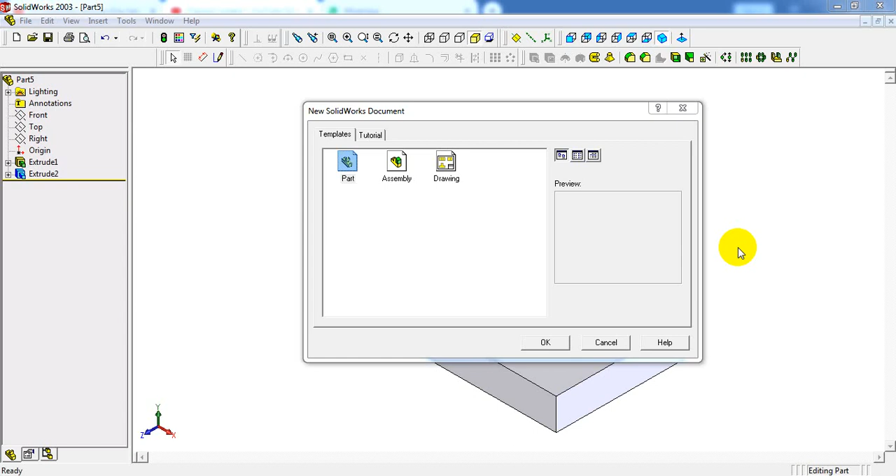Next, total height of the part is 25 plus 25. Total height is 50 mm. First we have to draw one rectangle in the front plane and do the dimension as 120 into height 25, and extrude the width of 15 plus 30 plus 15. Let's see how to do this.

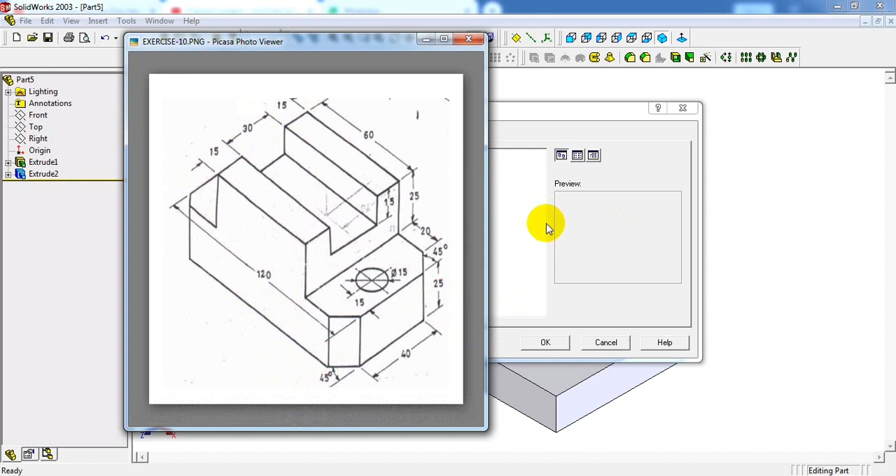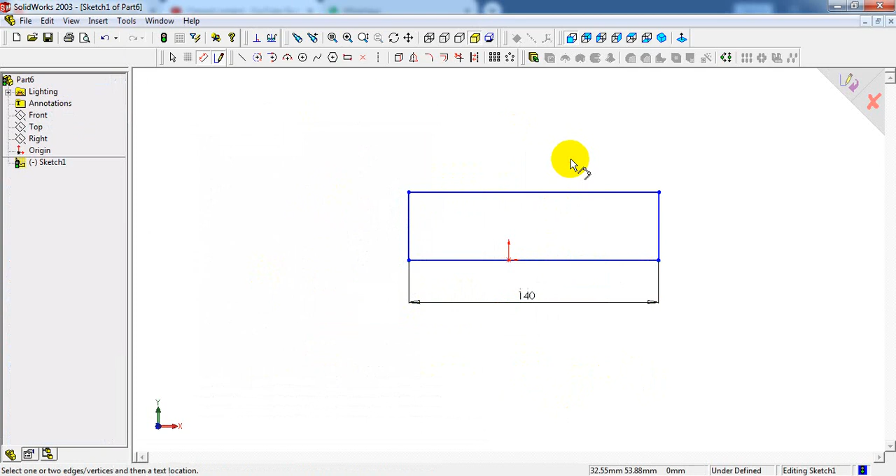Select part file and select OK. Select a sketch, select rectangle, draw one rectangle, make dimension, length is 120 mm, okay. Next, height is 25 mm.

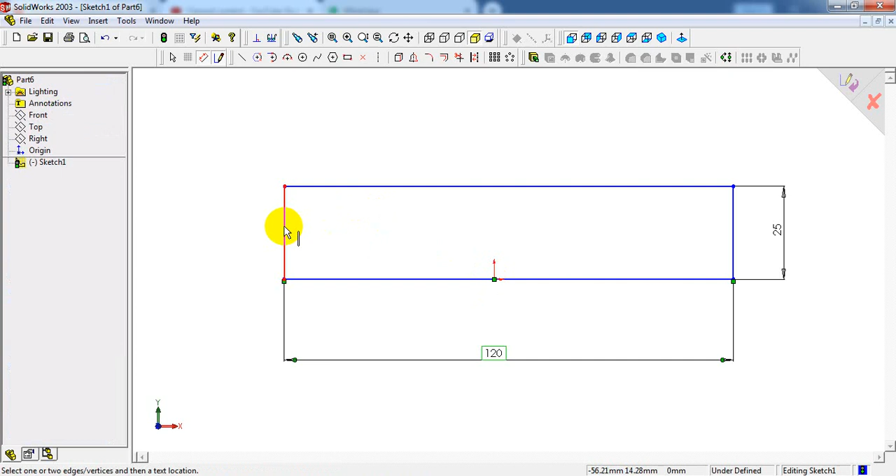We have to bring this origin point exactly the center of this rectangle. So select origin point followed by vertical line of the one side of the rectangle. Total length is 120. So half of 120 divided by 2 is 60 mm.

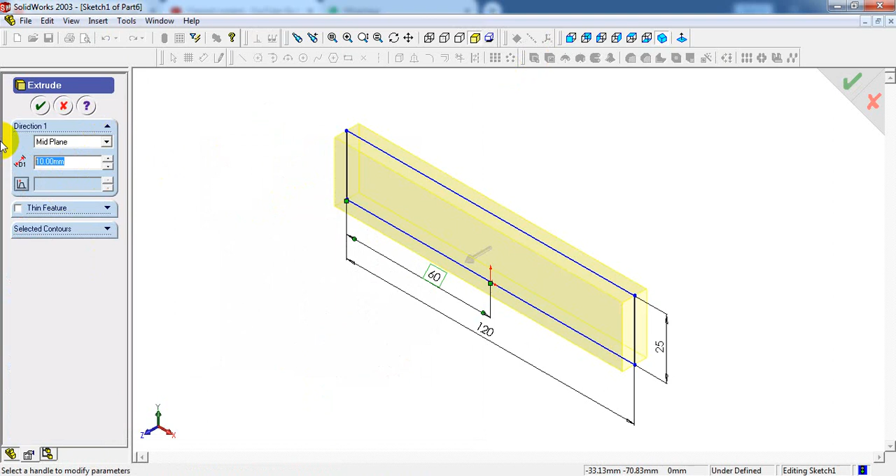Isometric view, extruded boss base, mid plane, 15 plus 30 plus 15. Select OK. Now select right plane, right view, sketch, draw one rectangle on this base,

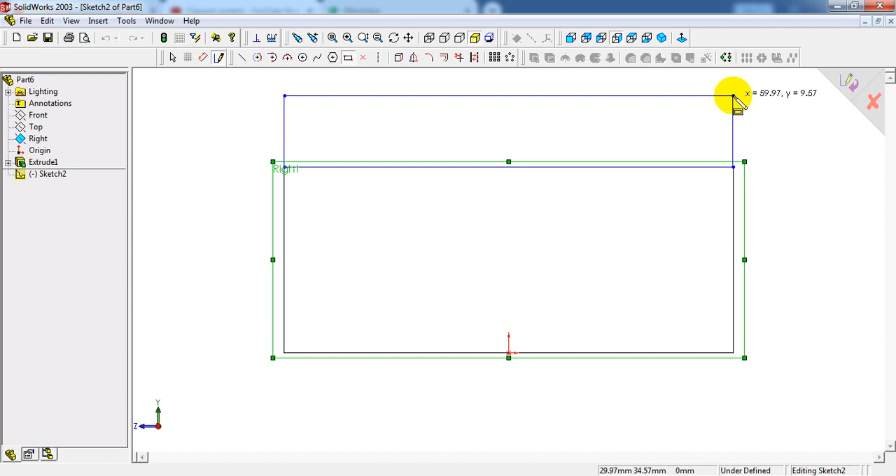rectangle from top left corner to the top right corner, draw one rectangle and draw one more rectangle like this. We have drawn one more rectangle. Height is 25 and width is 60. Dimension, height is 25, width is 60.

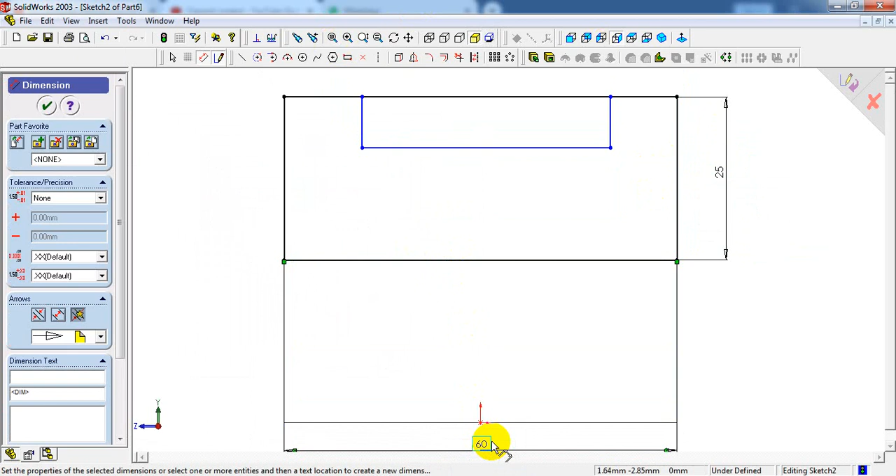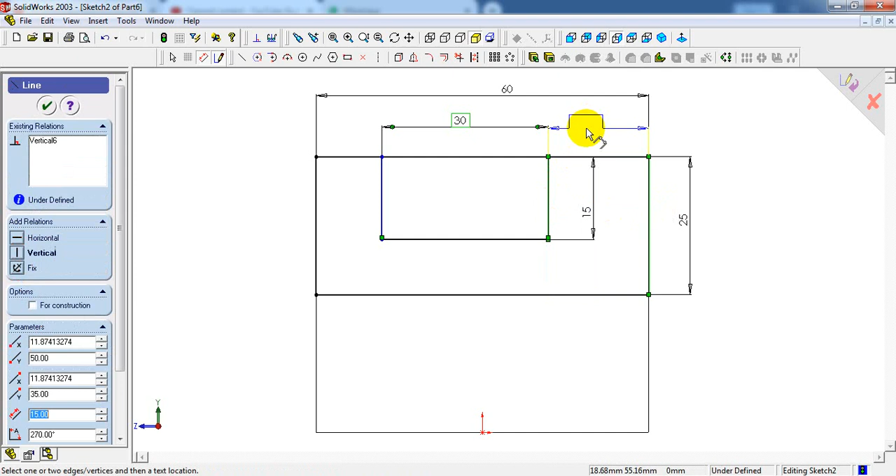Okay. Next, do the dimension for the inside rectangle. Height is 15, length is 30. 30, height is 15. Distance from this line to this line, it is 15 mm. This 15 mm, 30 mm, 15 and 30.

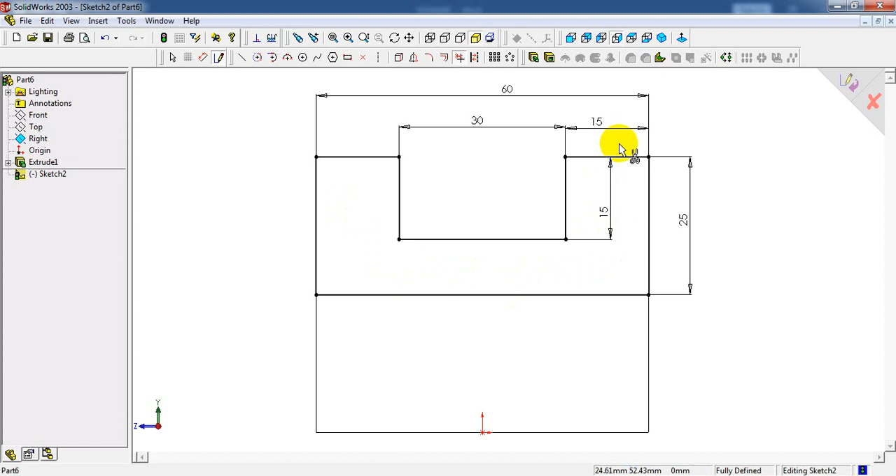Now select sketch trim. We have to trim this line. We need only this geometrical shape. Select isometric view, extruded boss base. We have to extrude a length of 120 mm. Instead of blind, select mid plane, select OK.

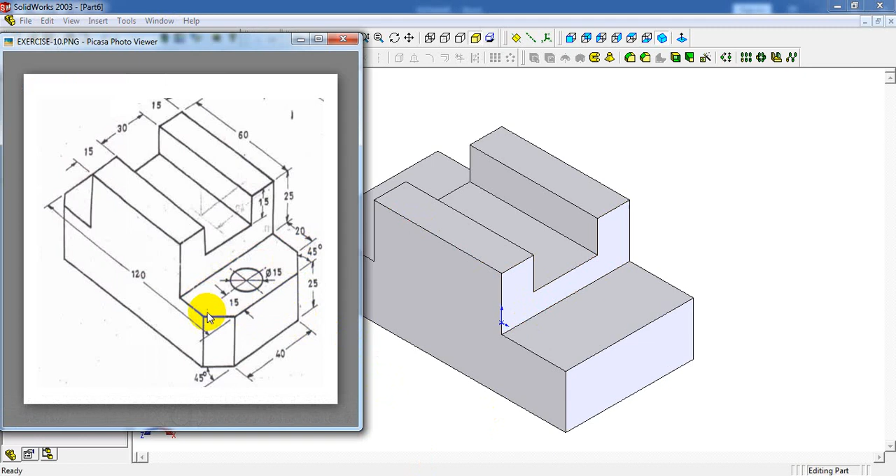Now see here, there is one slot here of diameter 15 and distance from right edge to the circle is 15 mm and it is exactly center to this width. Select top face, top view, sketch, take center line command. From origin point, draw one center line,

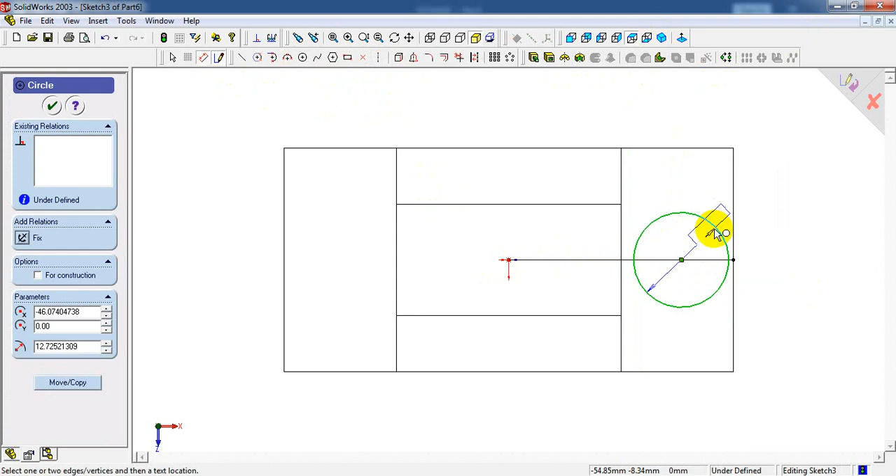take circle command, from this line as a center, draw one circle, make diameter of the circle 15 mm, enter 15, distance from circle to this edge is 15 mm. Now select isometric view, extruded cut, select through all, select OK.

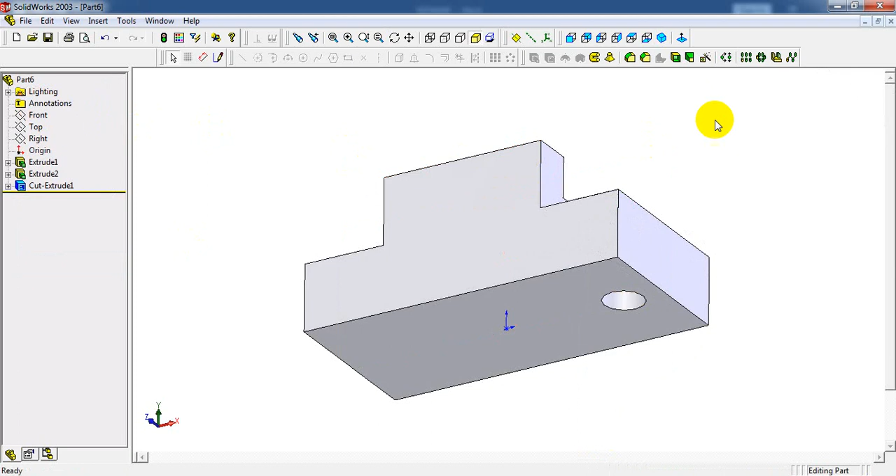Now select right plane, take mirror command, features to mirror, select this slot, select OK. The same feature has been mirrored. Now one more, see here it has mentioned 45 degrees. So we have to do chamfering, and he has given one length on the side, 40 mm.

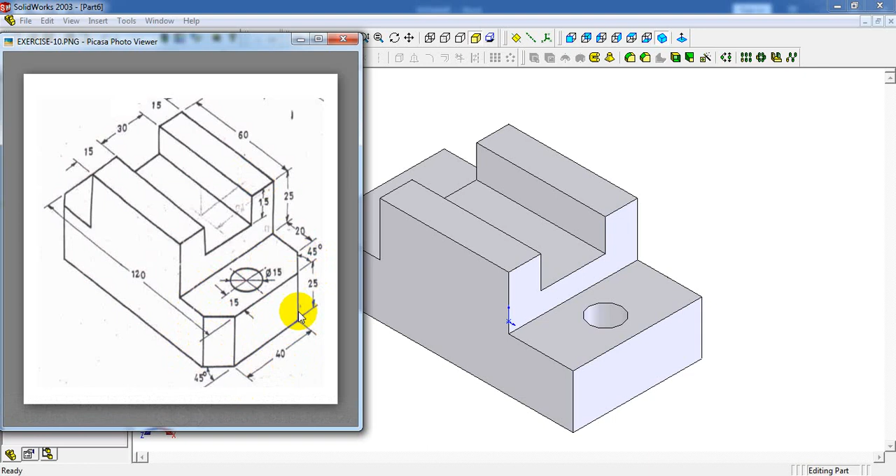Here total width is 60 minus 40 is 20 mm. So on both the sides it will be 20 divided by 2, means 10 mm. 10 mm from here to here, 10 mm from here to here. So how to do chamfering? Select chamfer, 10 mm, angle he has mentioned as 45 degrees, so by default it will be 45 degrees.

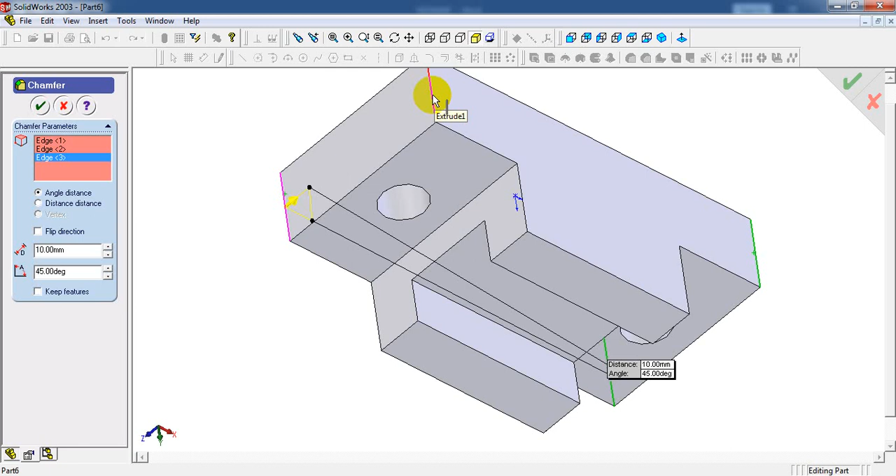Select the edges, one edge, second edge, this third edge, and rotate the part using the arrow keys or using mouse. Long press the scroll button and drag it, it will rotate. Select one more edge, isometric view, see 1 2 3 4 edges have been selected. Now select OK. So this is your 10th exercise.